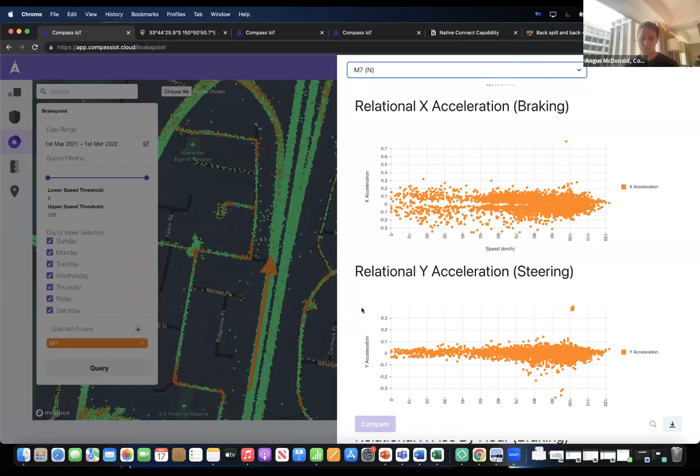At this little section, for example, you can see - obviously this is your speed distribution. You can see that the braking's not too bad, but we do get this really interesting cluster up the top for a right-hand swerve. Now, why would a right-hand swerve be going on a straight section of road network?

We can actually take a look at this section of road and it gives us a better understanding. This is the Rooty Hill off-ramp. You can see here 110 kilometers an hour posted speed limit, and vehicles are going to the left. You get off, but straight if they're going straight ahead. So in theory, there should be no right-hand swerve. The reason we get to see this data is because vehicles are trying to swerve into the right-hand lane to avoid the back of queue - that is, the back of the queue is going and spilling into the main line off the Rooty Hill off-ramp.

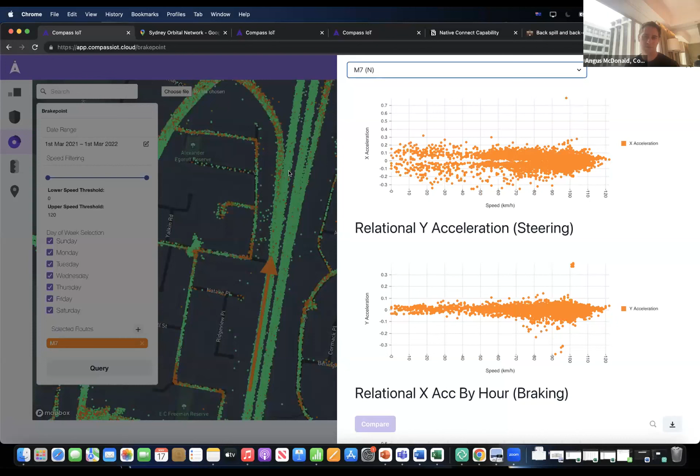Misses are an indicator of risk. They don't equal a crash, but they equal an increased risk, because where you see vehicles slamming on the brakes or swerving violently and losing friction with the road surface, we can better understand where those violent behaviors are and isolate them before a crash occurs. Normally, particularly with roadwork sites, you don't get too many chances. The short answer is generally that once you set up a roadworking site, you only know if it's failed if something has occurred. These near misses give us a proactive measure of safety.

And lastly, I just wanted to show quickly what this resulted in. This particular use case was a Transurban use case. The back of queue was very clear, and the swerving braking profile was very clear. And they were able to change the signaling to get more vehicles off the Rooty Hill off-ramp and then back onto the main line.

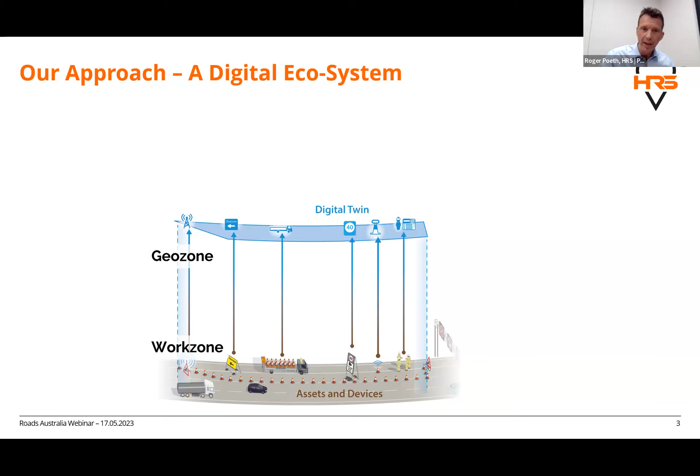Our approach is from the ground up. It's tangible devices that warn people on site, but we've had to build a back-end system that underpins everything we do. We've built an ecosystem that makes it really easy for people on site to use. In most cases in the UK, they wouldn't even know what equipment was on site because it's integrated into existing traffic control equipment like cones and lamps. But one of the fundamental breakthroughs for us was to create a digital layer, or a geozone, that we associated with a real live work site.

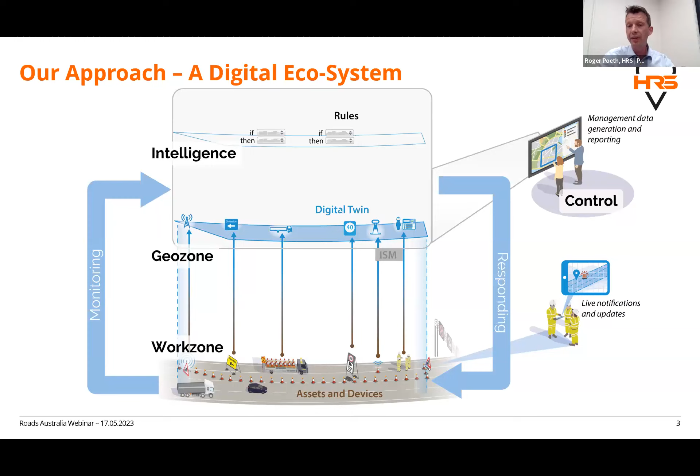That's created in our backend system, and the equipment, when deployed, operates in a fully automated way. That also allows us to capture an awful lot of data and store it based on what work zone was deployed, so it literally corresponds with the works taking place. For an authority or a traffic control company, they can really easily manage the equipment they deploy and also analyze the data they get back. I'll give a few examples at the end. So the whole back end, we call it: smart geozones equals smart work zones.

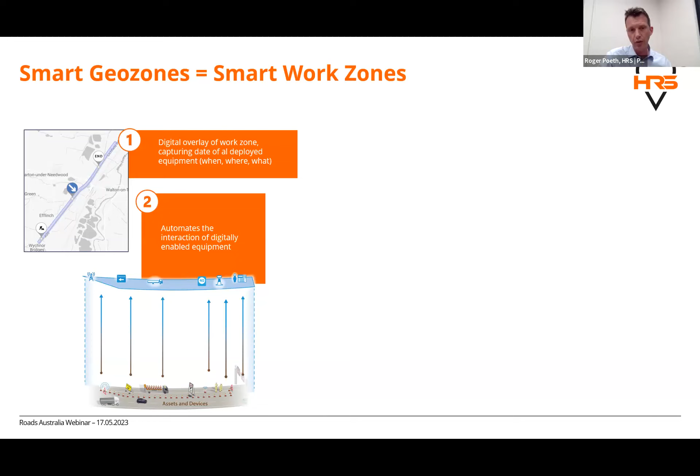By creating that digital layer, we can look at when, where, and what. Secondly, when equipment is deployed, it automates the way it functions, so at the call phase, the maximum people ever have to do is press a button. We've also been able to use that data once deployed to give a live, real, up-to-date status of when work zones are active.

There's been a lot of complaints in the UK with road users getting fed up with roadworks because they don't know exactly where and when they take place. There might be a lot of signage out, but nothing really happening, and that causes issues. We've seen this with full closures overnight, full carriageway closures, where people get frustrated around diversion routes and things like that.

What we've been able to do with the data our equipment provides is feed that into, for example, C-ITS systems, and in the future V2X, or direct communication to road users, so they're better informed and less likely to incur into work sites.

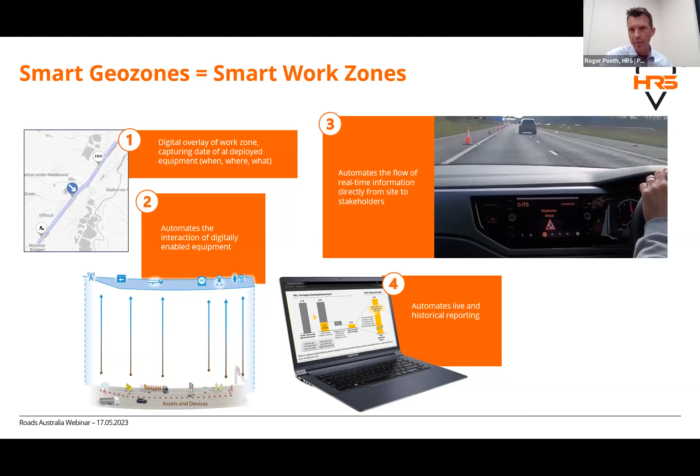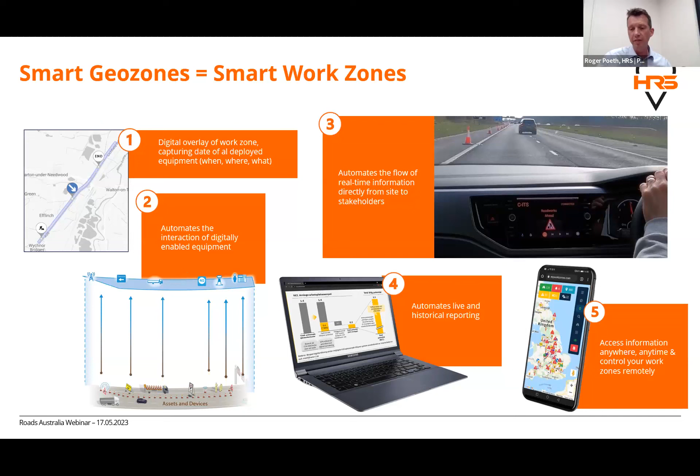The data we get back and share with our clients shows things like how many incursions happened, which is picked up by our equipment, where they happened, whether there are hotspots, and whether we should change the design of the traffic management, maybe use more signage. All of that is also available to people on site via an app. So that's the back-end system.

What we've been able to do with this is, first, improve safety massively. Weekly we get reports from people saying this has made a real difference to them. We've also been able to improve operational efficiency. On some really big full closures in the UK, we sometimes needed 40 or 50 traffic controllers. This isn't about getting rid of jobs, it's about allowing people to work smarter.

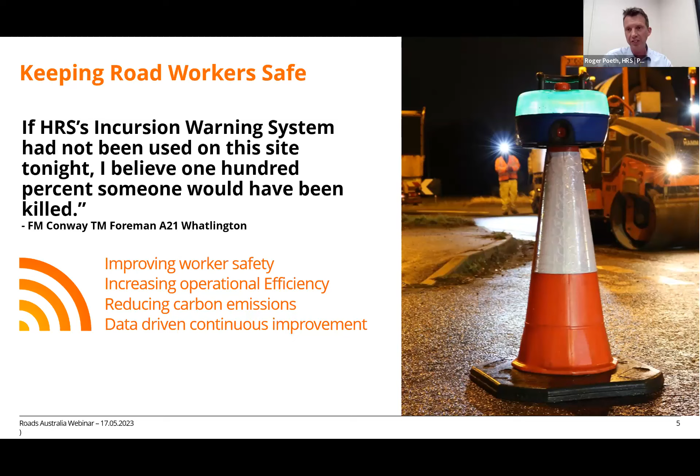When we close a road, abuse happens sometimes where people aren't very happy, and they challenge the people they can see. With this technology, we've been able to build a perimeter that detects an incursion and move people to a safer position. Likewise, some of the technology has helped reduce the inspections needed of traffic management - we can do it remotely, which reduces carbon emissions.

Don't want to go into how it works in too much detail, but just to show you the modularity of it, these devices are simply placed where people are working, and they connect to sensors around them. Those sensors could either be integrated into cones or cone lamps with impact technology, or we use laser beams strategically placed around the work zone. When they are triggered, they activate alarms in the work areas. Because of our geozoning technology, there is absolutely no issue with range or reach, so it's quite seamless from that perspective.

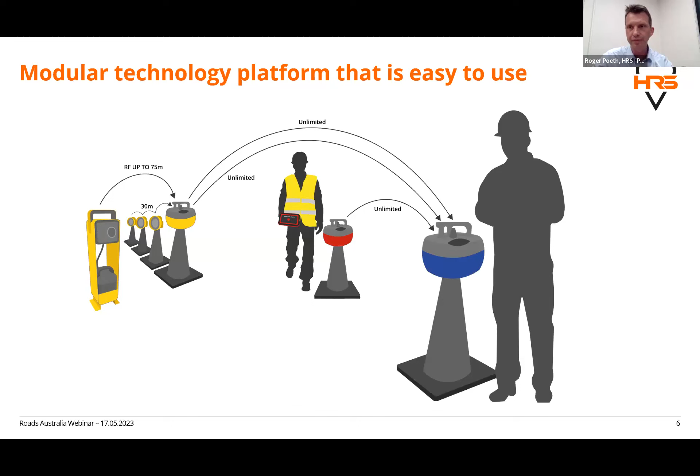Then the actual data that comes out of this platform - like I said earlier, we get data on deployment, which is really important for our stakeholders, but we also look at what is actually happening with regards to intrusions. The previous speaker, Angus, said you can anticipate where there's a problem with your traffic control. This is more about where we have actual incidents - near misses, but where do you have actual intrusions or actual alarm activation events. In the UK, we also couple that sometimes with camera technology, so we can capture the actual intrusions and learn from that - why are people making these mistakes? Although in a lot of cases people do it intentionally, which is even worse.

Some other aspects we're looking at as well is floating car data around the work site - what is the speed behavior of people around the work site. All that is captured, as James said in the intro, in what we call our My Work Zones platform. And I hand it back to you, James, for that one.

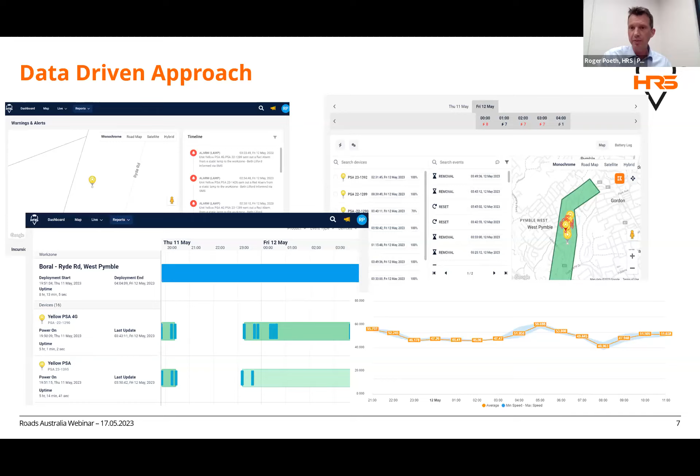Thanks, Roger. Altus has only recently brought your solution to Australia, so it's at a fairly nascent stage in terms of being introduced to the market, but you've got that track record and history in Europe, particularly in the UK. I wonder if you could let us know how the relationship with regulators evolved from that initial stage of adoption to putting out 18,000 deployments last year. Has that support been good? Has it been crucial? Maybe talk us through that.

In the early days, what we focused on really heavily was the user, because we wanted to make sure the people who deploy it believe it makes a difference - otherwise you're pushing water uphill with that. We've had really good support from Highways England, now called National Highways, from the start. But what we've done, as opposed to looking at regulation changes which can take a long time, is work closely with the whole industry to create a level playing field, because this technology was really hard even to commercially adopt since it's something new that doesn't quite fit within existing commercial models. So we've worked really hard to create a best practice category that has been supported by National Highways, and that's basically how it sits at the moment.

So it's called Raising the Bar. There's a series of Raising the Bar documents that don't just relate to traffic control, they relate to all sorts of aspects of how you manage work sites and roads in general. We basically worked with industry to create one around incursion prevention and management, and that's where our solutions sit. That opens it up for other parties who provide similar systems, but for the supply chain wanting to use it, it makes it easier for them to adopt. So that's taken a few years to do, but it's now almost seen as a must-have requirement on site.

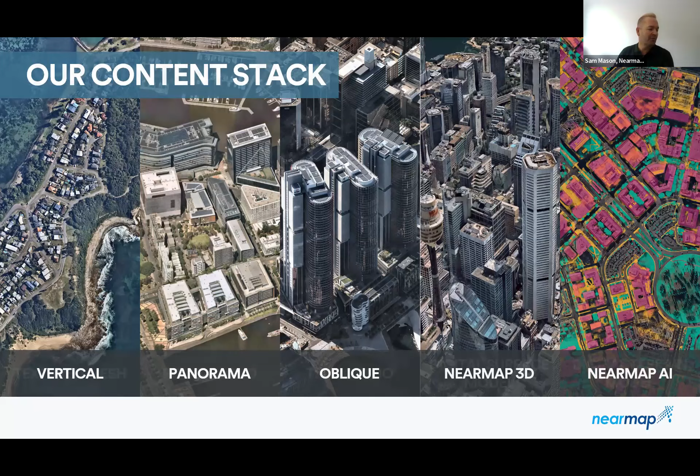Here's a quick look at our 3D family. Not going to go into detail on this one today, but we're going to have a look at a couple of these. Textured mesh on the left - that's building those 3D models, stitching together our imagery, that sort of stuff. And on the right-hand side, digital surface model and digital terrain model, which has particular relevance with what we're going to talk about today.

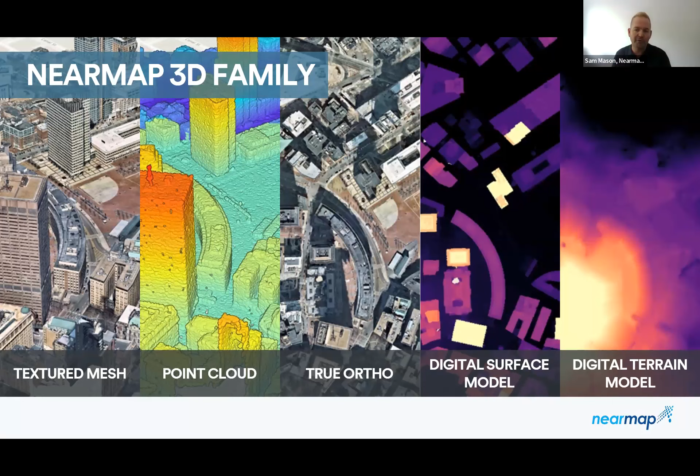In our Nearmap AI family, every time we fly our planes, we grab all of our imagery and pipe it through this AI system that we've spent the last 5 years building, and we do that for every single flight. So we have petabytes of data.

What we're actually doing here is object detection. We go and look at things that are out there in the world - things like roads, road markings, pools, solar panels, vegetation, roof materials, tree overhang, construction sites, the list goes on. We currently have about 72 different classes of things that we find in the world at various stages of production level. We make that available within a couple of days of flying as well.

We have that visualization option in our flagship product, which is a lightweight web application called MapBrowser, and I'm going to show you some examples a little bit later on about that. And lastly, if your company's a little bit more tech savvy, we also supply these data sets offline, or you can integrate directly into APIs and pull that data into GIS platforms, whatever way you need to go.

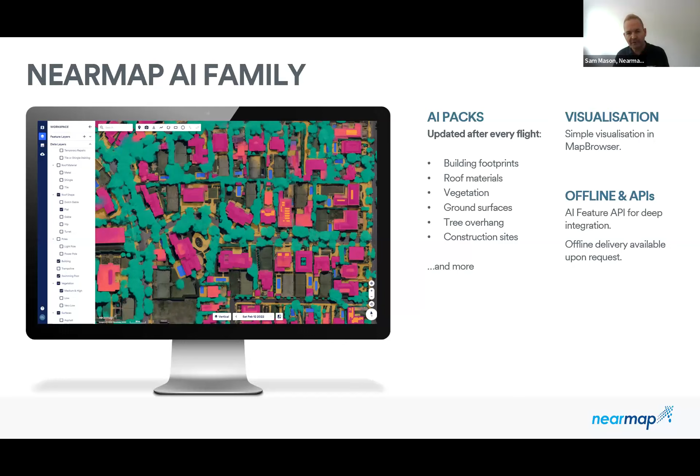So having said all of that, let's talk a little bit about remote planning. Now, remote site assessment is really all about maximising worker safety, and doing that means planning for site safety. And Nearmap helps here because our high resolution imagery and our world-class AI data sets work together to help you get to that outcome. Now, remote assessment leads to some obvious benefits - process efficiency, cost savings, and reduced risk to on-site personnel.

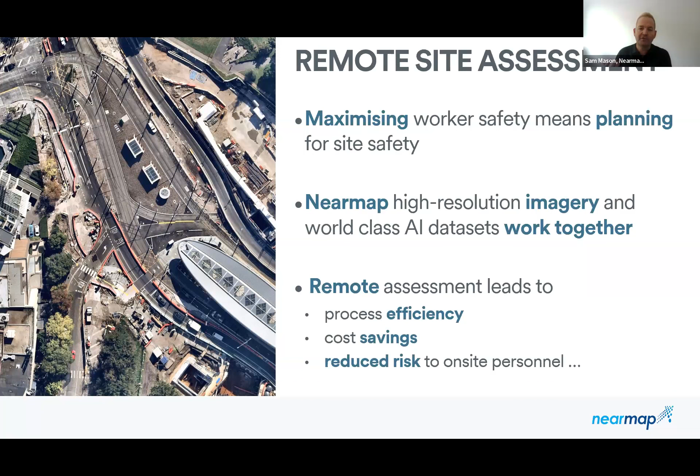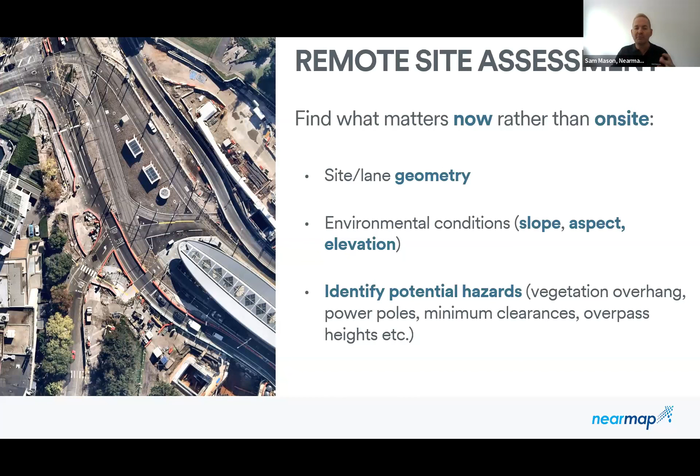What it's really about is finding out what matters now rather than when you get on site. So things like site and lane geometry, environmental conditions of the site, the slope, the aspect, the elevation, identifying potential hazards. You're going to want to look at things like vegetation overhang, where power poles are, minimum clearances, overpass heights, all of these kinds of things.

You're probably going to want to know about existing speed limits on approaches, and probably locate existing specialised infrastructure like cycleways, bus lanes, that kind of thing, and flag already in progress local construction. You might want to identify targets where you're going to have to do some temporary traffic rerouting. The point I want to make is that you can do all of this from your desk.

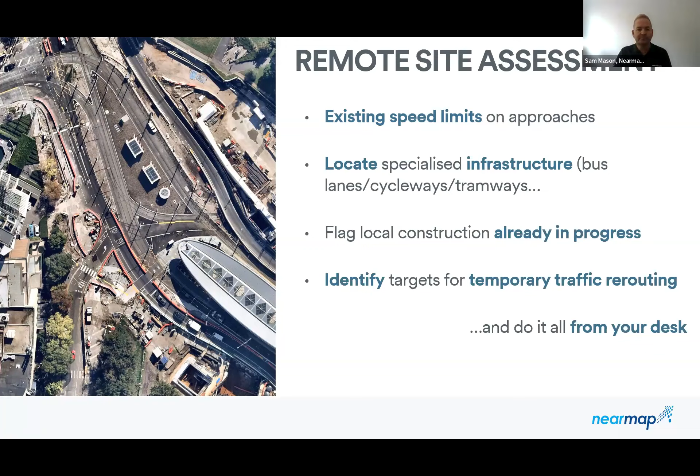Let's talk about what I'm actually talking about here and show you what it is that we actually have. So here's some examples of some of the categories of that 72 that I mentioned earlier. When we fly, we go and capture these things and they are available straight away. So let's have a look at some of them.

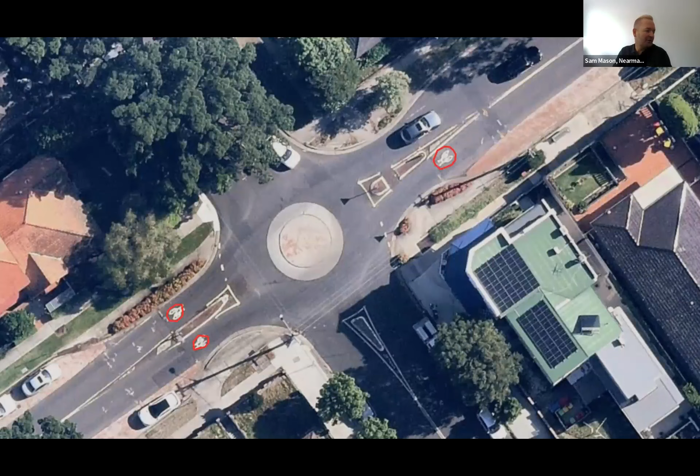Right here, we have cycle markings on the road - we pull them out straight away. We even get the cycleways themselves as well as those markings. And I'll point out too that our models are that good that they're robust to noise. You can see there that even that one in the upper right-hand corner is even slightly occluded and we still pick them up. That's sort of where AI is at today.

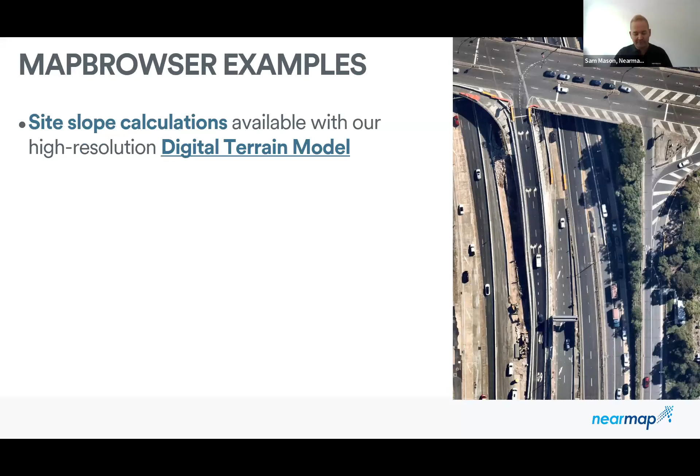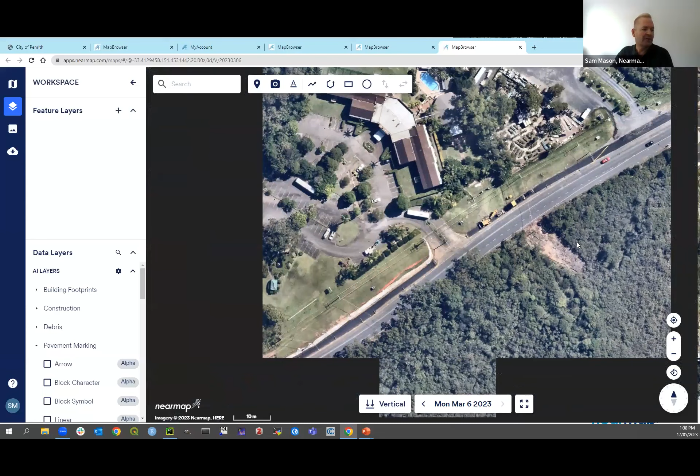Another interesting case is planning for approaching traffic management when you have limited site access. This example is up at the Central Coast, a place called Wamberal. There's a very narrow 2-lane freeway that feeds all the upper Central Coast traffic south to Gosford, pretty heavily trafficked, and you can see they've actually built a separate lane to store the road excavation equipment. The reason they've had to do that is because we've got this national park to the east here where Foresters Beach is. That's the kind of thing you want to know, again, while doing your site planning.

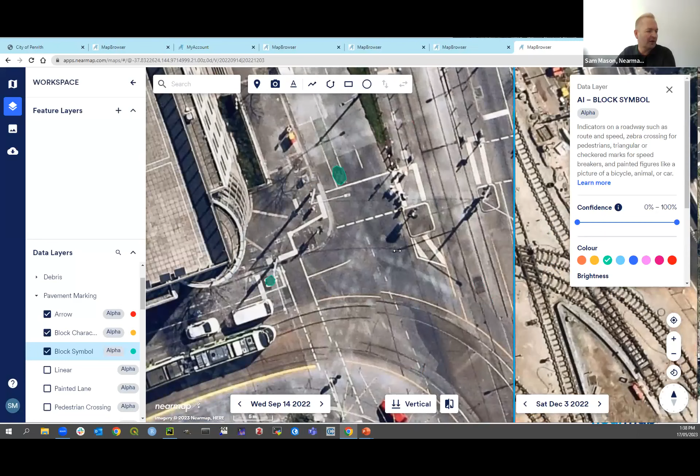Jumping ahead to some big ones, we go down to Melbourne and look at the traffic rerouting that's been done around Anzac Station at St Kilda. This is a really good example. Over here on the left we have our available AI layers, and I'll turn a couple on so you can see what we can grab. You can see there's been a massive amount of work rerouting both the tram line and the vehicular traffic laneways, as well as changes to the cycleways and the oncoming speed zone.

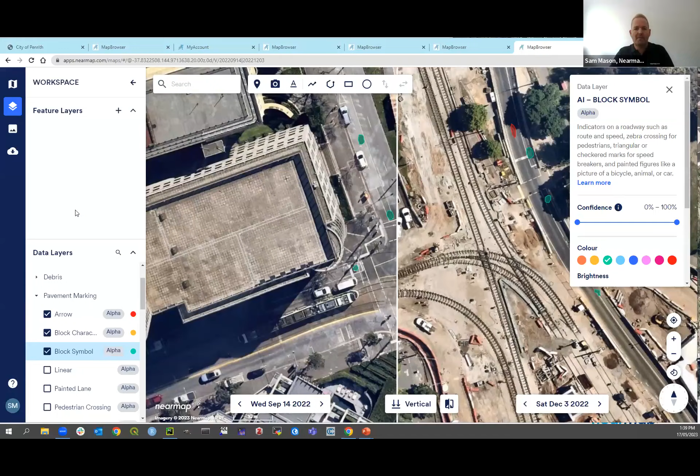And lastly, the big one is Warringah Freeway. This comes up every now and again—there's a lot of work going on here in Sydney, and this is a really good case where you can look at the overpass height, change traffic routes, speed limits before and after, and changes to navigation markings. So let me just bring that one up.

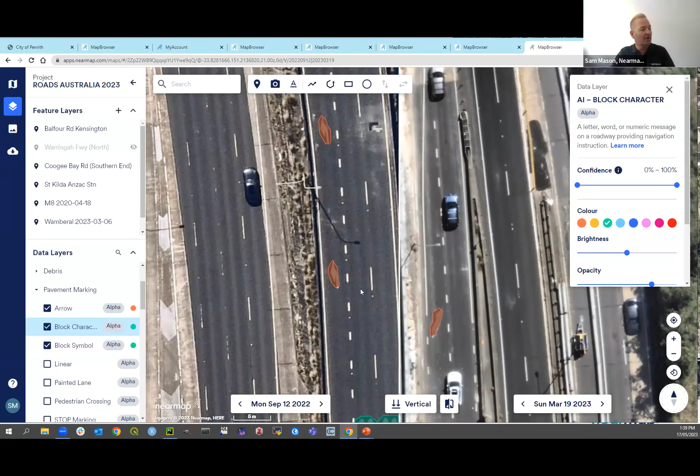If we turn these layers on, turn arrows on, you can see this is an example where prior to the work being done, this was an 80 zone. The lanes have changed, the traffic has been rerouted, the speed dropped down to 40, and the line markings have changed over time. A good example here is what I mentioned before about measuring overheight.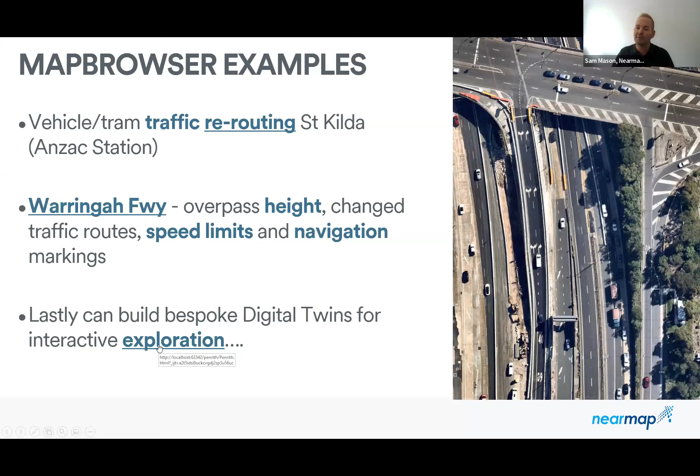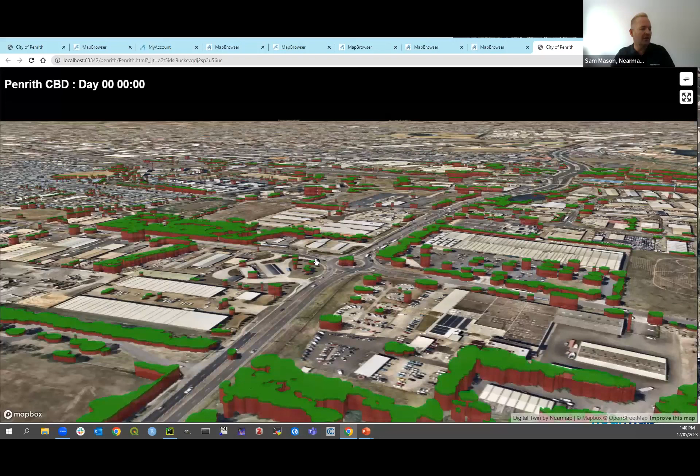The last thing I'll show you: if you really want to go hard, you can pull all of our AI layers together and even build your own digital twin ahead of time, getting that kind of interactive experience. This is the Penrith CBD area, and you can bring in all of our different layers—our 2D imagery, vegetation locations and heights, building locations and heights, roof materials, and most importantly, the poles.

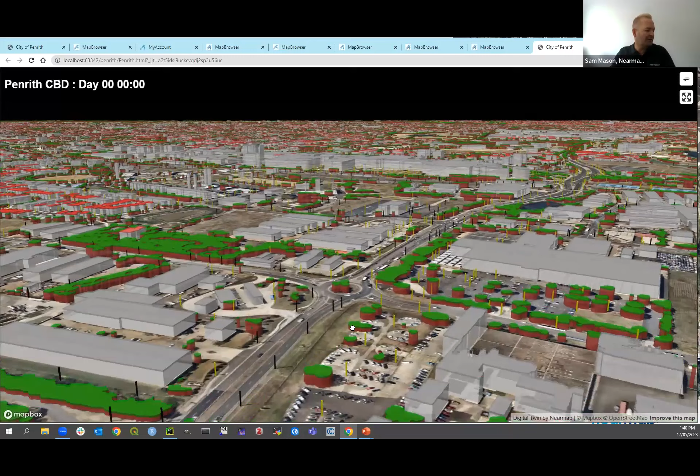As you come in here, you get this interactive perspective view. So looking at this roundabout, I can say, okay, I've got vegetation in the middle at 6 meters, I've got some more here at 3 meters, and so on. I'll leave it at that.

Thanks, Sam. It's interesting that you brought up the Warringah Freeway example, because earlier Angus was showing me some data about behavioural changes that have occurred for the Warringah Freeway project. It happens to be one of the sites we've been trialling the HRS solution on. And in a serendipitous twist of fate, the chair of our Road Worker Safety Working Group is the head of safety for CPB, and it happens to be a CPB job—so an interesting choice of example.

The question I wanted to ask you, Sam, is that there's been a huge wave of infrastructure investment across most of our metropolitan capitals and in the regions as well. Are our cities changing quickly? You're taking very high frequency, high resolution imagery—are you seeing our cities transform, and is there anything that's caught you by surprise in terms of the speed of that change? Yeah, the answer to all of that is yes.

One of the more fast ones is actually the one I showed in that presentation, down at Anzac Station at St Kilda. Two months, you would think you wouldn't catch much difference, but when we see particularly ones like Warringah Freeway, where there's such a major impact and so much being thrown at it, we see that changing quite a lot.